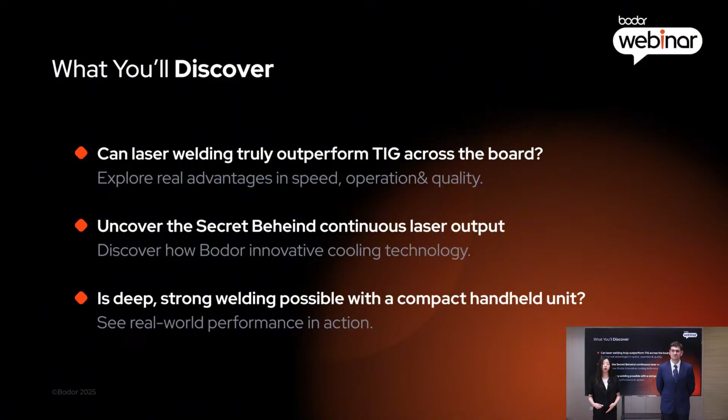Today, we are not here to lecture about technical jargon. Instead, we are going to let the machines do the talking. We will compare the two techniques in speed, ease of use, and weld quality.

But performance isn't the whole story. We will also reveal the core technology that delivers continuous laser output and show how Bodor's cooling system ensures stability and durability. And of course, we will conclude with a live Q&A session. Drop your questions in the chat anytime, and our team will be ready to answer. So let's dive in and discover what laser welding can really do.

Before we jump into the test, Alex, could you give us a quick overview of the two welding methods we are comparing today?

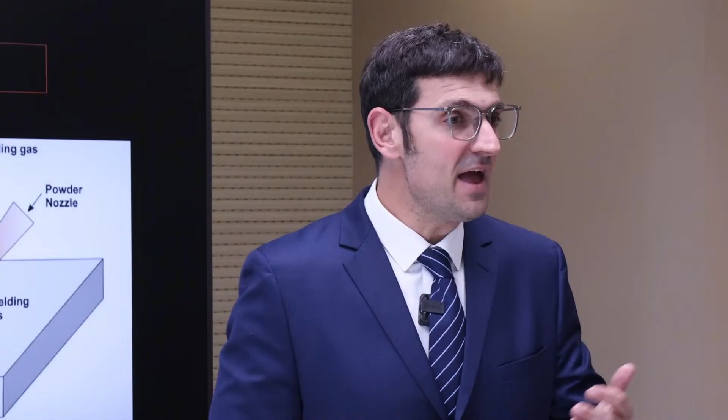Let's start with TIG welding. This is a traditional process. A high frequency, high voltage is applied between the tungsten pin and the workpiece to break through the argon gas and make it electrically conductive. Then a continuous current is supplied to melt the base material. It's prized for precision and fine control, but it's slower, demands greater operator skill, and produces a wider heat-affected zone that can damage surrounding material.

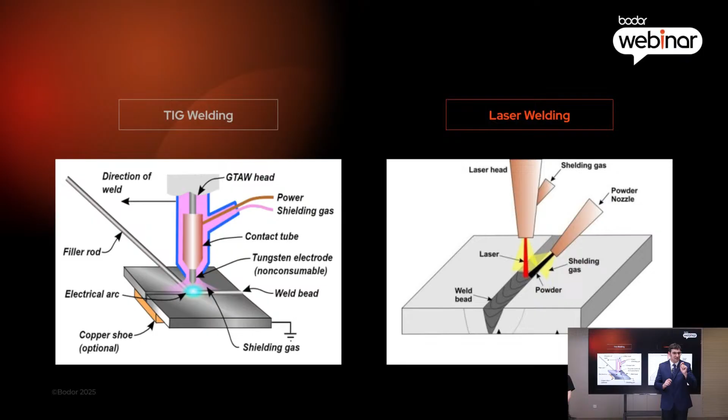Now, contrast that with laser welding. A high-energy laser beam concentrates heat exactly where it needs to be, delivering faster travel speeds, deeper penetration, and minimal thermal distortion. The process is clean, efficient, and increasingly popular in modern manufacturing.

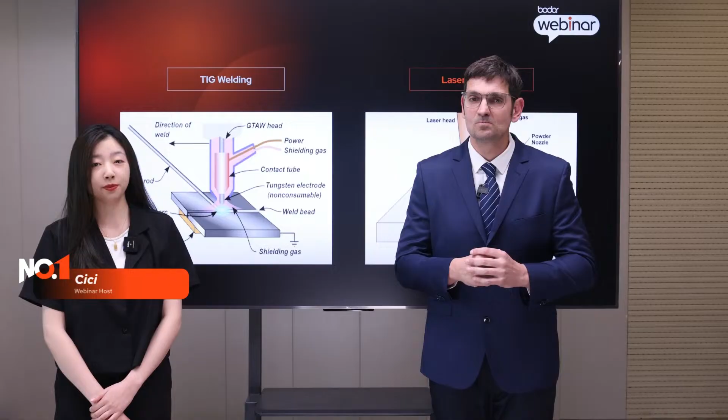Great summary. So today isn't just an old versus new, it's about which method performs better in real-world conditions. On that note, what materials are we working with?

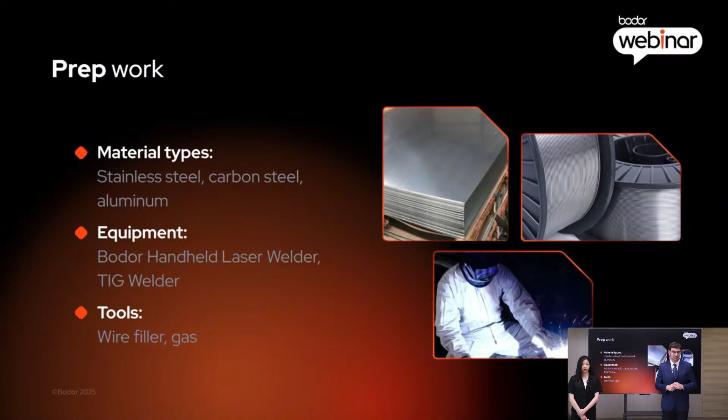All right, let's take a look at what we've prepared. There's 2mm and 4mm stainless steel and carbon steel, 2mm and 3mm aluminium, which are common in signage, furniture, machinery, and electrical components.

Okay Alex, I noticed filler wire on our slides. Can you explain its role and how the two methods differ? Absolutely. In TIG welding, filler wire is critical. In most cases it isn't optional, it's essential for weld quality, but feeding the wire by hand in perfect sync with torch movement is challenging and requires skill.

That manual feed must be tricky. It is, especially for new operators. Even small inconsistencies affect weld appearance and strength. But with laser welding, you've got options. For thin to medium plates, you can usually weld without any filler wire at all. And when you do need filler, like on thicker materials, the system has an automatic wire feeder, which keeps the feed consistent and takes the pressure off the operator.

Perfect. Real materials, real data, real-world scenarios. Laser vs TIG, who wins? Let's roll the first demo video.

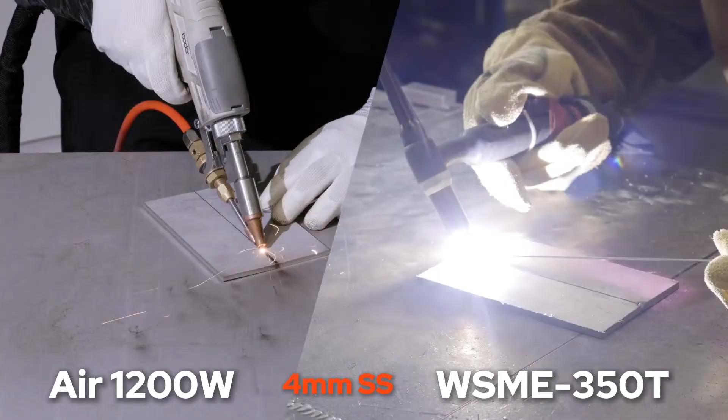Alright, here we go. On the left, you'll see handheld laser welding in action, and on the right, TIG welding using the same materials and same conditions. Laser speed is eye-opening, isn't it? It's clearly leading the race.

That's right. With 4mm stainless steel, laser welding moved significantly faster with smooth torch movement. TIG welding, on the other hand, needed a much slower travel speed and careful coordination to get proper fusion. In real-world production settings, we typically see laser operate at 3 times the speed of TIG across various materials, sometimes even more.

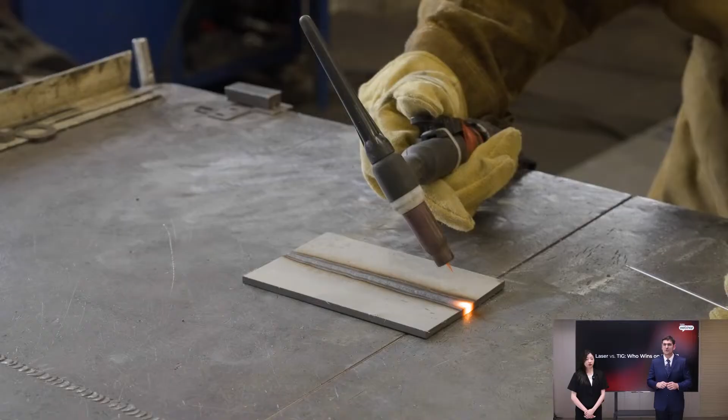The workpieces welded with TIG have a large thermal effect, slow heat dissipation, and are extremely hot to touch. We need to wait for the heat to dissipate. It looks like there's some warping on the TIG workpiece. That's a common issue with TIG, mainly because of its wider heat-affected zone. The surrounding metal absorbs more heat, which can cause edge lift and distortion, especially on thinner materials. And the thinner the plate, the more noticeable that warping becomes.

To help you see the difference more clearly, we also ran tests on 2mm stainless steel, which really highlights the effect. Great, let's take a look. Now the welding begins. With thinner stainless steel, the laser welding maintained high speed and delivered a smooth, controlled seam.

Now we shall see it all side by side, and the difference is obvious. The laser is already starting its third seam, while TIG is still midway through its first seam in the comparison video. Exactly.

And here's something important. When it comes to TIG welding thin sheets, there's a real risk of burning through the material if the operator isn't highly skilled. That's why TIG demands a lot of precision, training, and control. Laser welding, on the other hand, gives you stable, focused energy. So not only is it faster, it's also much gentler on the material, which makes a big difference when working with thin plates.

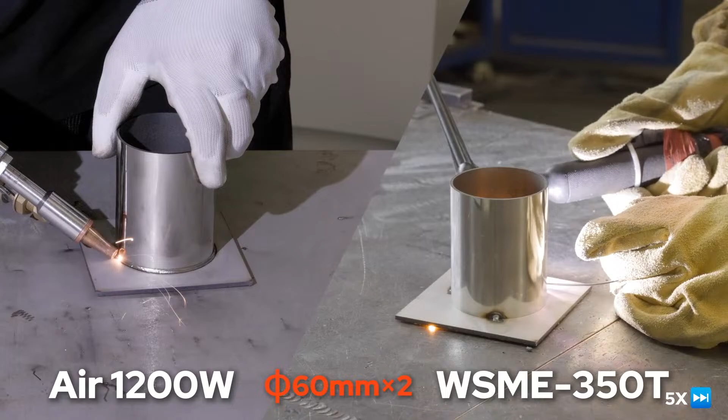Even with curved and more challenging surfaces like round pipes, laser welding maintains a clear speed advantage. Because the laser delivers concentrated stable energy, the operator can move faster, even on complex shapes.

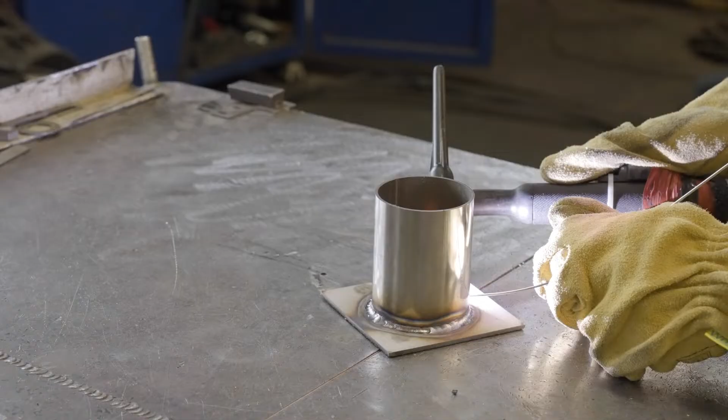But speed is just one part of the story. Let's talk about the ease of operation. With TIG welding, the operator must constantly manage manual wire feeding and adjust the angle and distance of the filler wire throughout the weld. That slows things down and takes a lot of skill to get right.

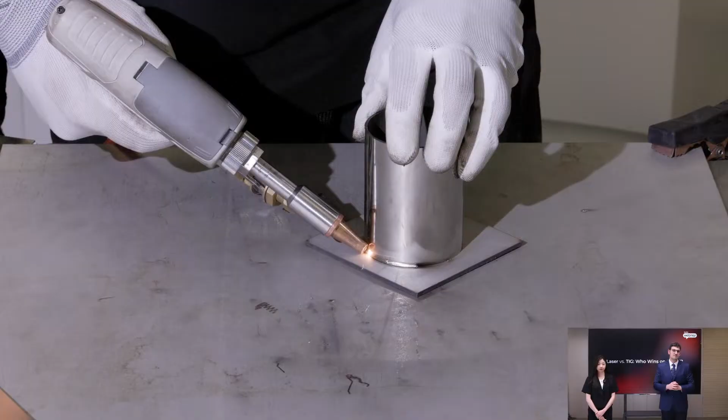In contrast, Bodor's handheld laser welder offers a much smoother experience. It can be equipped with an automatic wire feeding system, which means the operator only needs to focus on torch positioning, no need to manually feed the wire. So the process is not only faster, but also far easier to learn and perform, even for newer technicians.

So it's faster, smoother, and less skill intensive. That's a big deal for workshops trying to train new staff or scale up production quickly. Laser welding helps you get consistent results with less effort, and that can translate into real productivity gains.

We have seen steel. Now let's tackle aluminium, which is famously tricky. We will compare laser and TIG on 2mm and 3mm plates. Roll the video. In this video, we're focusing mainly on...

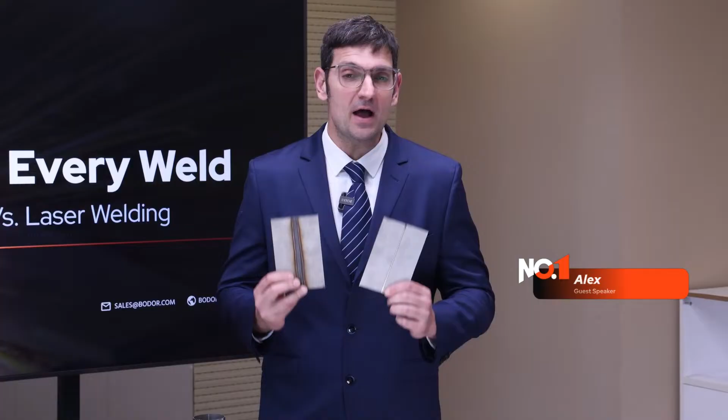Okay, let's start with weld appearance. In the two samples here, both are 4mm stainless steel. One is welded using TIG and the other with our handheld laser welder. And honestly, the difference is obvious, even at a glance.

You can see how clean and consistent the laser weld is. The seam is tight, smooth, and shows almost no spatter or discoloration. And the best part? This level of quality holds across different materials, not just stainless.

Take carbon steel for example. The weld is sharp, clean, and shows minimal surface oxidation.

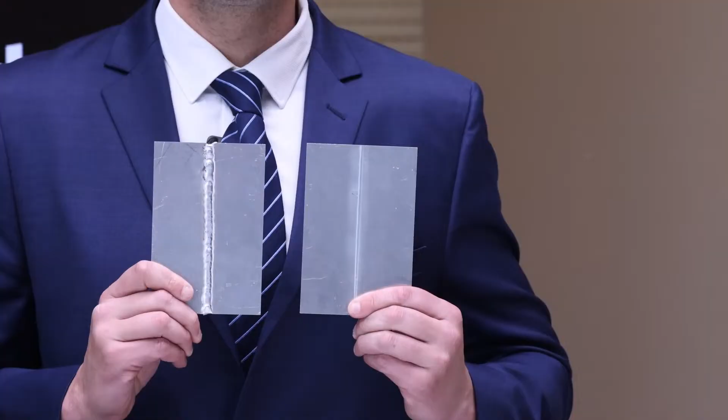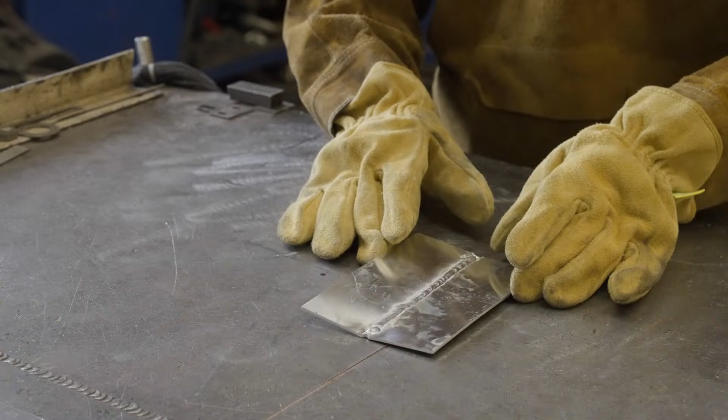With aluminium, which can be notoriously difficult, the laser still gives you a bright, clean seam with hardly any soot or edge burn. On the TIG welded piece, you can feel and even see some slight warping along the edges. On the laser welded side, the base material stays much more stable. There's no visible deformation and the edges remain flat, a huge plus for maintaining dimensional accuracy.

In most cases, the result is so perfect, you can skip post-processing. No grinding, no sanding, just weld and move on. It's a kind of finish that not only looks professional, but also saves a ton of time and effort.

And this is exactly where handheld laser welding really shows its strength, especially for industries that deal with complex or irregular welds. Because it's so easy to handle and the welds often come out perfectly formed in just one pass, it's a great fit for applications like kitchen cabinets, staircases, elevators, shelving units, and custom stainless furniture. In these types of jobs, where precision and efficiency really matter, laser welding makes the whole process simpler, cleaner, and faster.

That's really impressive, Alex. Not just in how it looks, but in how easy it fits into so many different manufacturing needs. But of course, in real-world applications, it's not just about how a weld looks. It's also about how strong and reliable it is under the surface. Can you share some more, Alex?

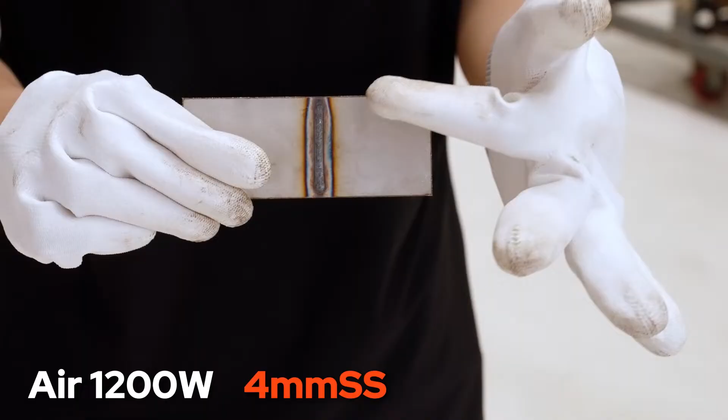this weld holds up when we put it under serious pressure. Here's what we did. We pulled the welded strip until it finally snapped. The machine recorded a peak force of 35 kilonewtons.

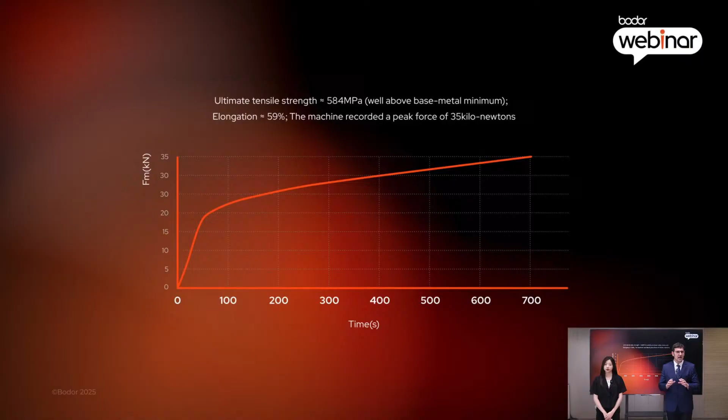When we convert that into stress, we get about 580 megapascals. Now, to give you some context, ordinary mild steel sheets tend to fail at around 350. So this weld is over 60% stronger than mild steel and right on par with the base stainless plate itself.

And here's something really impressive. Before it broke, the welded strip stretched by 59% of its original gauge length. That level of stretch means the weld isn't just strong, it's not brittle. It can handle vibration, impact, and even forming after welding, without cracking or failing.

That's impressive. But what does that really mean in terms of practical use? Great question. It means our handheld laser welds can actually pull harder than the base stainless. Yet, they're still flexible enough to bend nearly 60% before breaking.

That's the kind of performance you want in applications like food-grade tanks, where hygiene and durability really matter. Architectural skins, where flexibility and aesthetics are key, and any thin-gauge stainless steel fabrication like elevators, kitchenware, or medical equipment. So you're getting a weld that's not only strong and durable, but also versatile and production ready. Thanks for great insights, Alex.

So let's take a moment to recap what we just saw. Throughout today's session, we've seen how handheld laser welding consistently outperforms traditional TIG welding in real-world scenarios across flat sheets, round pipes, and a variety of materials.

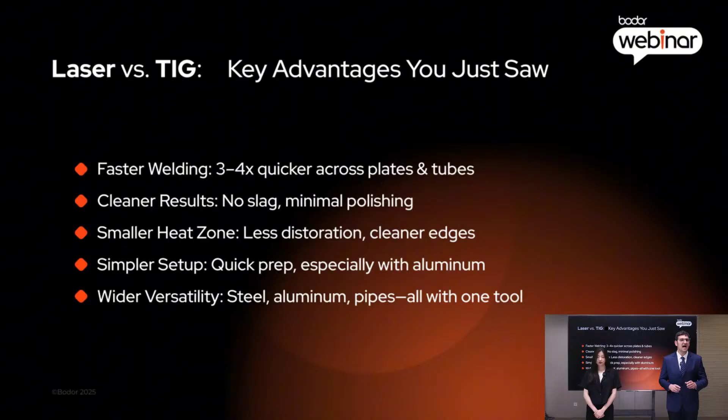What does that mean for your business? Faster production cycles, fewer reworks or rejects, and much lower stress for operators, especially in high volume environments. Whether you're working with stainless steel, carbon steel, or aluminium on flat sheets or round pipes, handheld laser welding delivers cleaner, faster, and more reliable results at every step.

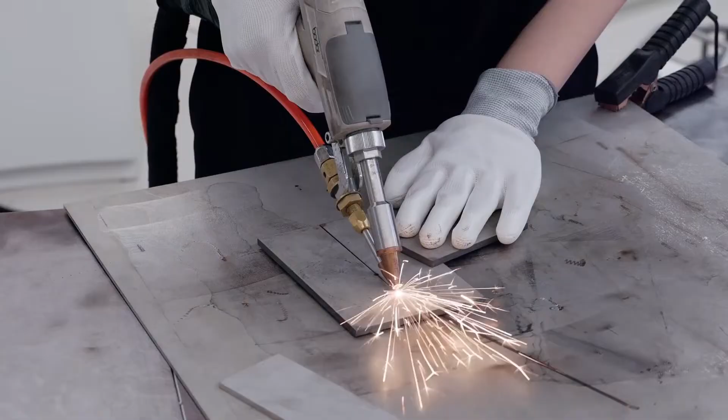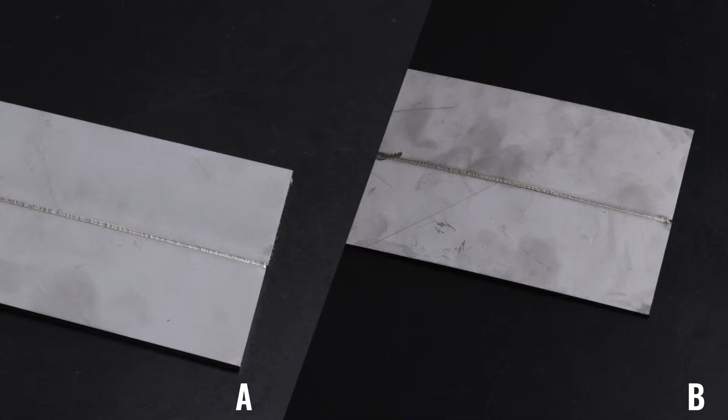Alright, let's reveal the answer. There it is. If you guessed sample B, you got it right.

Honestly, I was a little nervous at first, but once I got started, it was incredibly stable, and the torch was easy to control, and it was simple to stay on track. Another thing I loved, the one-touch interface. I will be honest, I'm not a fan of complicated machines, but these were totally different.

Absolutely. We just saw you using the rotary knob in the video, and now let's take a closer look at what it can actually do.

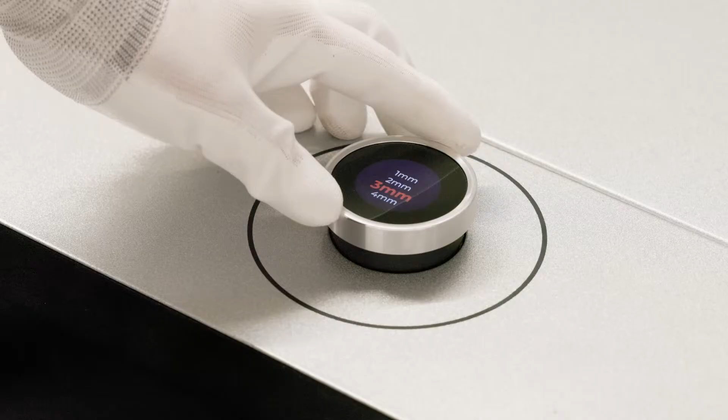And for operators, we are just getting started. We've included preset parameters for various materials and thicknesses, like stainless steel, carbon steel, aluminium, and even copper. You can change power, pulse frequency, or wire feed speed, all with a single twist. It's quick, responsive, and perfect for on-the-fly adjustments.

It's incredibly user-friendly. I was able to switch from stainless to aluminum in just a few clicks, and those built-in presets took out all the guesswork. And that's what makes this system ideal for new operators and flexible production lines. You can train your team faster, reduce errors, and maintain consistent weld quality, no matter who's holding the torch or what shift they're on.

Alright, we have covered performance, weld quality, and ease of use. But let's talk about something every business cares about: cost. Laser welding doesn't just help you work faster, it can also seriously cut down your operating costs. Alex, walk us through where those savings really come from.

Sure, Cece. Let's start with the most obvious one: efficiency. Laser welding is fast, like really fast. So with laser, you're cutting welding time dramatically, which means more work done in less time. Compare that to TIG welding, where the operator has to guide the electrode by hand the entire time, it takes longer to complete each weld.

Next up, ease of use. Laser welders are super intuitive. You set the parameters and you're ready to go. Even someone with minimal welding experience can learn it quickly and get consistent results, which saves money on both training and labor. TIG welding, on the other hand, requires real skill. It takes time to learn and even longer to master. That means more training, higher hiring costs, and more pressure on your team.

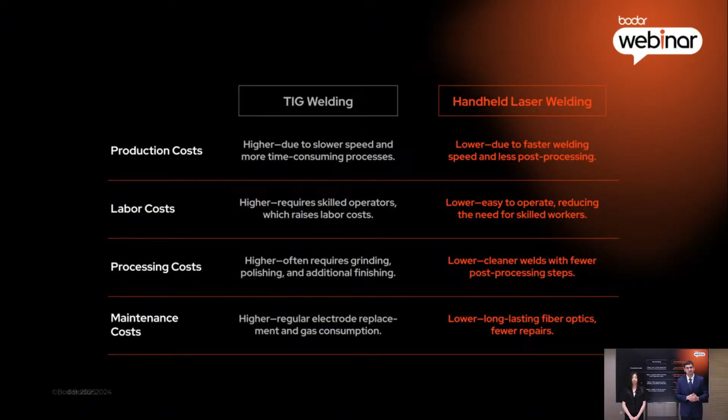Thanks for the great insight, Alex. Now we know that even though handheld laser welding can significantly cut operating costs, many of you might still be wondering about the initial investment.

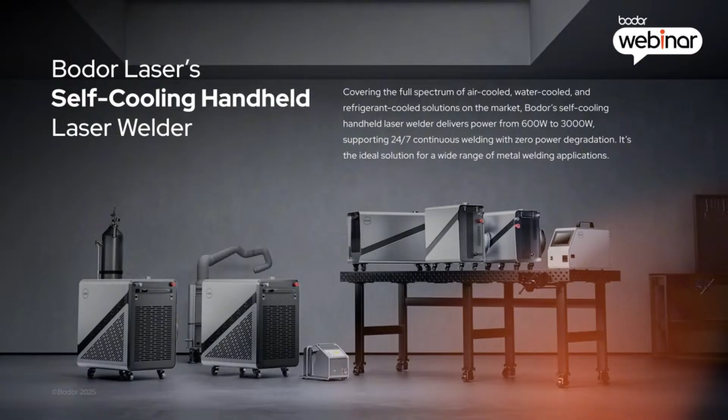Alex, here is a real question. What keeps everything stable? The answer lies in one of Bodor's core technical strengths, our ability to deliver continuous laser output with high efficiency and reliability. Whether you're working in a temperature-controlled factory, outdoors in the heat, or in a cold, open workshop, a stable beam is critical to ensure consistent weld quality and machine longevity. That's where Bodor's cooling technologies come in. Today, I'll walk you through the innovations behind 3 of our systems: Pro, Air, and Eco, each designed to match different working environments and production demands.

Now, let's take a closer look, starting with the Pro series. Right, Alex? Thanks, Cece. What really sets the Bodor Pro 1500 welder apart is its intelligent cooling system. Bodor developed a self-contained, closed-loop temperature control system that keeps the machine running steadily even in challenging environments. We're talking about working conditions from -20 to 60 degrees Celsius and even up to 90% humidity. The cooling system automatically adjusts to maintain optimal performance, no matter the heat, humidity, continuous 24/7 operation. You can trust Bodor Pro 1500 will stay cool, stay stable, and keep delivering results hour after hour.

That's really impressive, especially for factories running 24 hours for 7 days production lines, or operating in extreme climates. Exactly. As you can see, it's a great fit for precision-demanding industries like kitchenware, sheet metal fabrication, electrical cabinets, and custom furniture. Anywhere that seam consistency and surface finish really matter, the Pro series is the ideal choice.

Now, that's impressive, being able to maintain stable performance even in extreme environments. But here's the thing, in real-world welding, especially out in the field, it's no longer just about how powerful your cooling system is. You need something that's compact, energy efficient, and easy to move. Right. Now, let's talk about the Air series. This unit is all about mobility, energy efficiency, and easy operation, making it a great fit for welding on the go. Take a look at the specs on slides.

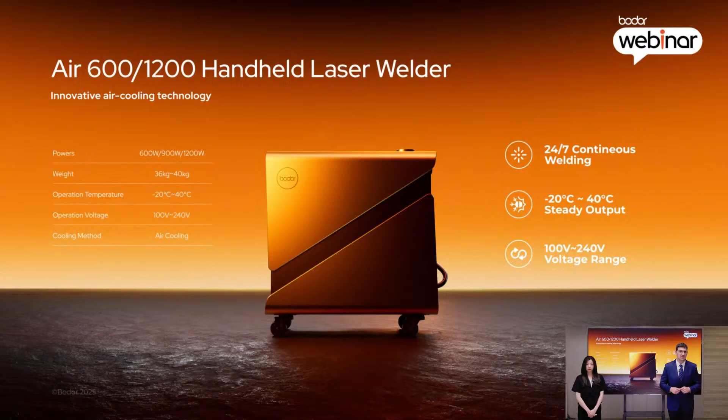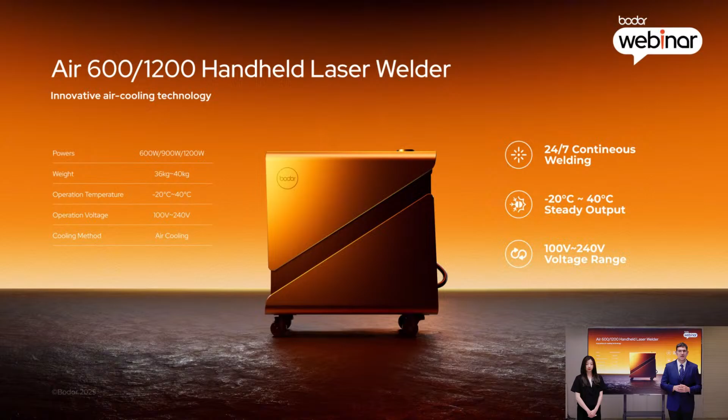It weighs just 36 kilograms. At its core, it's a phase change cooling system. It circulates distilled water through copper tubing, supported by a radiator and a temperature-activated fan. It's lightweight, power-saving, and supports a wide voltage range, ideal for outdoor jobs, mobile repairs, or remote field work, where every kilogram makes a difference.

That's a great overview of the Air series, compact, adaptive, and ready for the field. And if what you are after is advanced water cooling technology, the Eco Series is absolutely worth a closer look. Alex, what makes it stand out? It features Bodor's industry-leading water cooling technology, which ensures outstanding thermal control.

Even during continuous operation, when welding 1mm sheet, it can reach speeds up to 190 centimeters per minute, a huge leap in efficiency compared to other 1500 watt machines in the same class. Another key advantage is the seamless coordination between Bodor's self-developed laser source and operating system. Because they're fully matched, the entire system runs smoothly and consistently with stable laser output and precise control. And for manufacturers moving towards smart production lines, the Eco Series is automation ready, equipped with an I/O port for seamless integration into robotic and automated systems.

So whether it's the Pro, Air, or Eco Series, Bodor's cooling systems are designed to keep your machines stable, no matter the environment or workload. And that stability is key, because when you are dealing with high power levels, you can't afford temperature change or power drops. Which brings us to something our users care about a lot: power.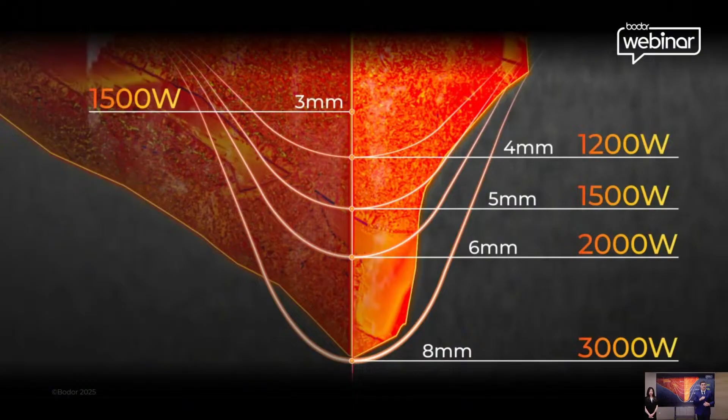What does that mean? At the same power level, Bodor machines can achieve deeper penetration than most comparable welders on the market. Let's take a look at the chart on the screen. Here you'll see a side-by-side comparison of Bodor's welders and other machines in the same class. Under full power conditions, Bodor's weld depth reaches 4mm at 1200 watts, 5mm at 1500 watts, 6mm at 2000 watts, and up to 8mm at 3000 watts. That's well above the typical performance in this category.

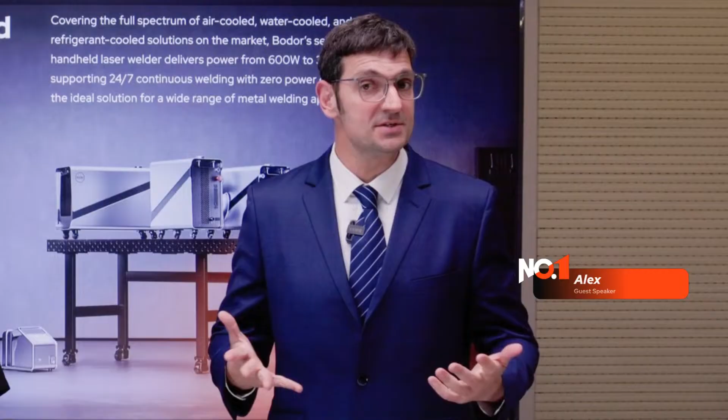Today's webinar, we made it clear, whether it's the Pro, Air or Eco Series, Bodor handheld laser welders are designed to make welding faster, easier and more efficient. They're up to 3 times faster than TIG, especially on thin sheets, and incredibly easy to use, thanks to features like one knob control and auto wire feeding. Weld quality, clean seams, deep penetration and minimal distortion, even on tough materials like aluminium and stainless. And beyond the welds, they save on gas, power and labour. Some workshops are cutting labour time in half. These machines are built to run hard, clean and deliver full rated power with real depth, up to 5mm at 1500 watts. So to sum it up, fast, stable, easy to use and built for serious productivity.

Alright, now let's jump into our interactive Q&A. If you dropped questions in the chat, thank you. We are also prepared answers to some of the most common questions we get from users around the world. Alex, let's kick it off. Alex, in what scenarios can handheld laser welding replace TIG welding?

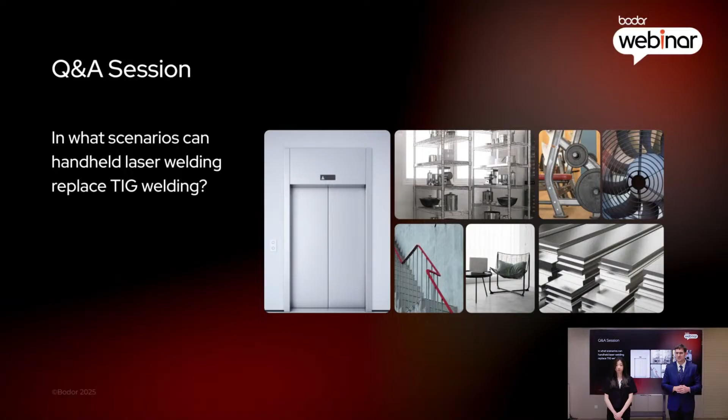Great question. Handheld laser welding really shines in applications like thin sheet welding, especially 4mm and under, and for parts where the appearance really matters, like kitchenware, home appliances, signage, and decorative finishes. It also has an edge in tight or complex weld angles, like inside corners or edge seams. Because the heat-affected zone is much smaller, the welds come out cleaner and more precise, often with no need for post-grinding or polishing.

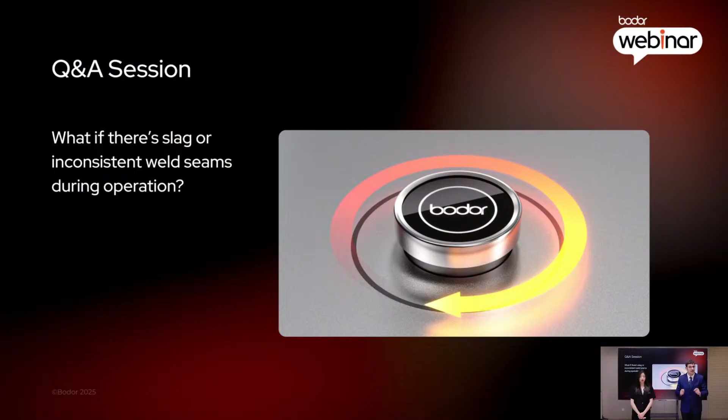Here's another one that comes up often during demo trials. What if there's slag or inconsistent weld seams during operation? That's something Bodor designed around. Our handheld laser welders use an internal process library that automatically matches the right power and settings to the material type and thickness. You just adjust using the single rotary knob. That takes a lot of the guesswork out of the process and really reduces operator error. Thanks to our wide voltage compatibility, the machine also stays stable even during voltage fluctuations, avoiding weld roughness caused by unstable laser output. Can Bodor's handheld laser welder also clean or cut?

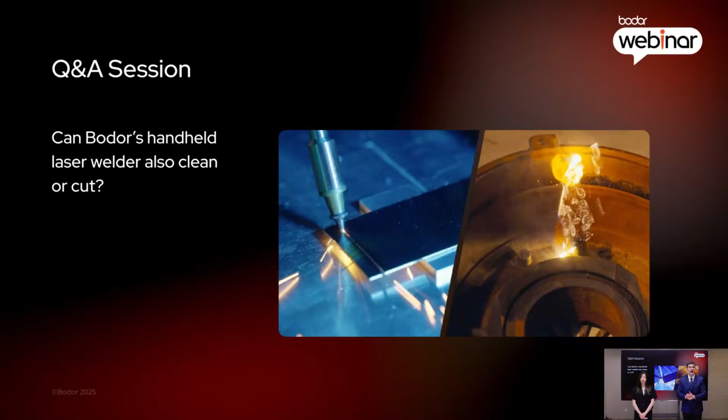Yes, absolutely does. Our handheld laser welder isn't just for welding. It also supports cleaning and even cutting, depending on the power. If you attach the special cutting nozzle, it turns into a laser cutter. For example, the 600-watt model can cut through 1 to 2mm of metal, and the 1200-watt version handles up to 4mm, clean and precise. And when it comes to cleaning, it can remove rust, paint, and surface impurities before welding, or clean up oxidation afterward. All Bodor handheld laser welding series torches are available with a wide cleaning width of up to 120mm.